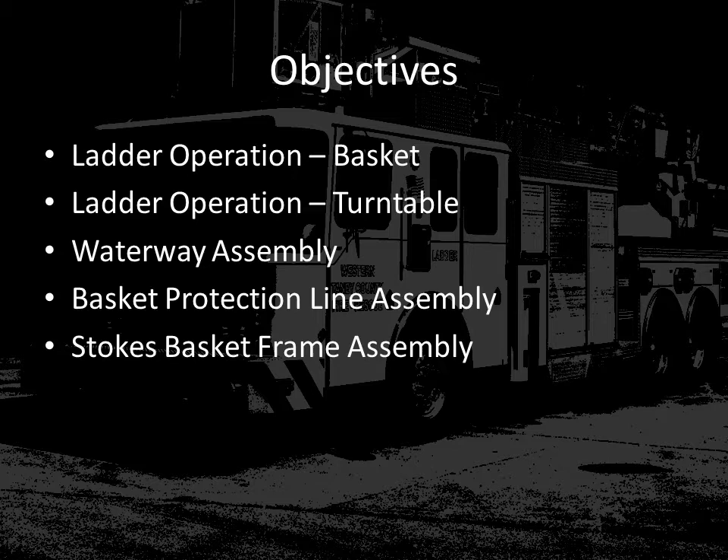A few reminders from Section 3: make sure that the apparatus is properly positioned for fireground operations, whether it be for fire suppression, for rescue, or for ventilation or any other operation. Ensure that the apparatus is free from any overhead obstructions before the final position for ladder operations. And also ensure that the apparatus is properly jacked and stabilized prior to using the ladder.

Failure to follow these quick reminders will delay starting ladder operations. It may prevent the apparatus from being repositioned because other apparatus are now in close proximity, and it may actually prevent the use of the apparatus completely.

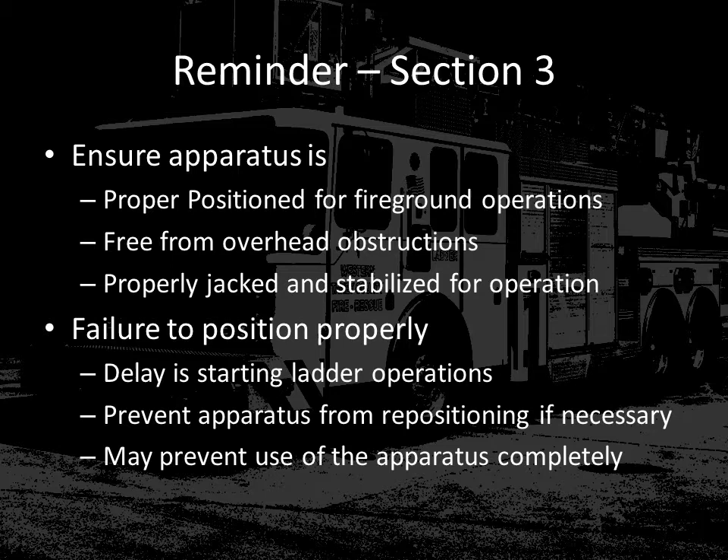When we talk about ladder operations, we're going to begin at the rescue basket. The controls are very similar between the controls that you find at the rescue basket and at the turntable operator's position. Anytime that you're wanting to move the ladder, it's important to remember that the dead man switch on the floor directly underneath the control panel must be depressed for ladder movement.

The joysticks, both in the rescue basket as well as the turntable control operator's position, are progressive, which means that when you begin to move the joystick, the ladder doesn't immediately begin to move. You can move the joystick all the way to its full fastest position, and the computer will open the valve slowly and close the valve slowly to ensure that there's no violent movements within the ladder.

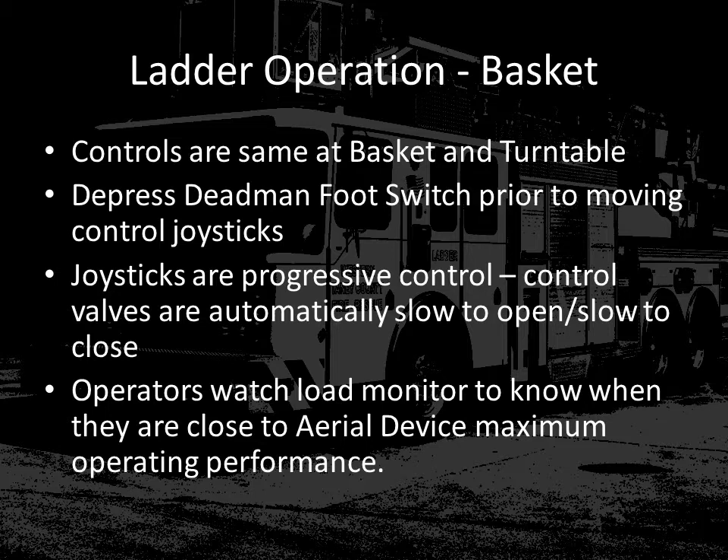Also, you will notice that there is an analog load indicator at the basket control panel. This analog load monitor is allowing the operator to monitor the loads and the stresses on the ladder during operations. And this will be one indicator when you have exceeded or have met the maximum capacities of the aerial device.

On this slide, we have the operating console diagram for the rescue basket controls. At the very top, you will notice a red emergency stop button. This button is to be used anytime there is an emergency situation where ladder operations must immediately stop. It is a button that can be reset.

Directly below, you will notice two joysticks. The left joystick only controls the extension and retraction of the fly sections of the ladder. The right joystick controls the left and right rotation at the turntable, as well as the elevation and lowering of the main ladder.

Directly below the joysticks, you will notice that there are four buttons that are either green or yellow. Starting at the top left of those four buttons, the first button is the engine start or stop button. If you need to stop the engine, this is the button that you can use to control that. The green button directly below is the rung alignment button. If you're going to have someone climbing the ladder, you will depress the button and then use the joystick to either extend or retract the ladder to the next position where the rungs are aligned for climbing.

On the top right yellow button of the four buttons, this is an impact sensor light. If for some reason there is a collision with the rescue basket or with portions of the ladder, this will indicate that the ladder has possibly been overstressed or has come in contact and may have been damaged in some way. The last green button that you see is the automatic auto bed function. When the ladder is ready to be put away and stored, once ladder operations are complete, this will be the button you'll depress to normally store the ladder.

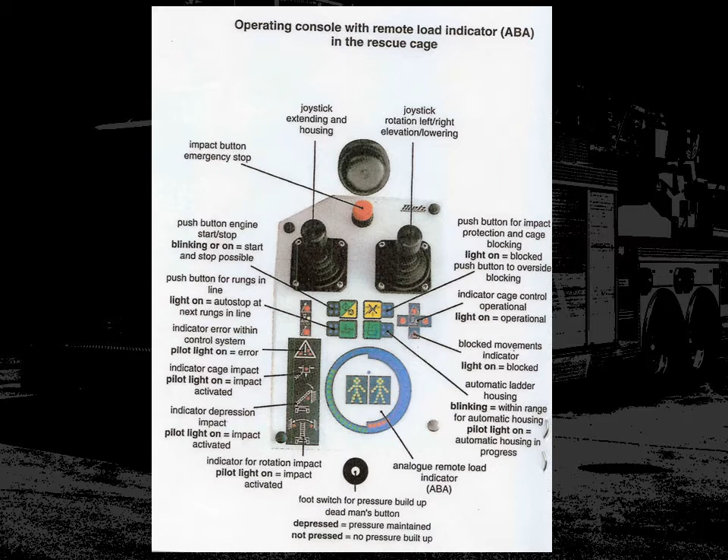Here is another diagram of the rescue basket control panel. The blocked movement indicators are directly below the respective joystick that the indications are for. On the left joystick, you'll notice that there are two blocked indicators as well as a green indicator for normal operations.

If the retraction or extension of the ladder for the left joystick is being restricted, the respective LED will be illuminated. This will be corrected when the movement of the ladder is brought to a condition that is acceptable for the computer. The right joystick has 4 blocked movement indicators for either raising of the ladder, lowering of the ladder, a left rotation, or right rotation.

If one of those movements is being restricted, the corresponding LED will be illuminated. If all movements are available, the green LED in the center will be illuminated. There is also the analog load indicator, as well as other indicators on the panel.

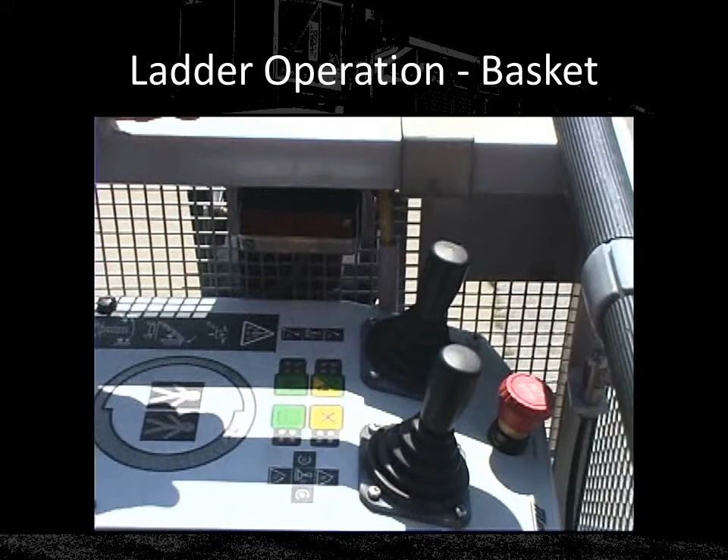When moving to the controls at the turntable, remember that these operations are similar. The layout of some of the controls and their indicators are going to be in a different location from the rescue basket. In the floor pan at the turntable operator's position, there are 2 pedals instead of 1. The pedal on the left is for the intercom to allow communications between the turntable operator and the rescue basket. The pedal on the right is the dead man switch for ladder operations.

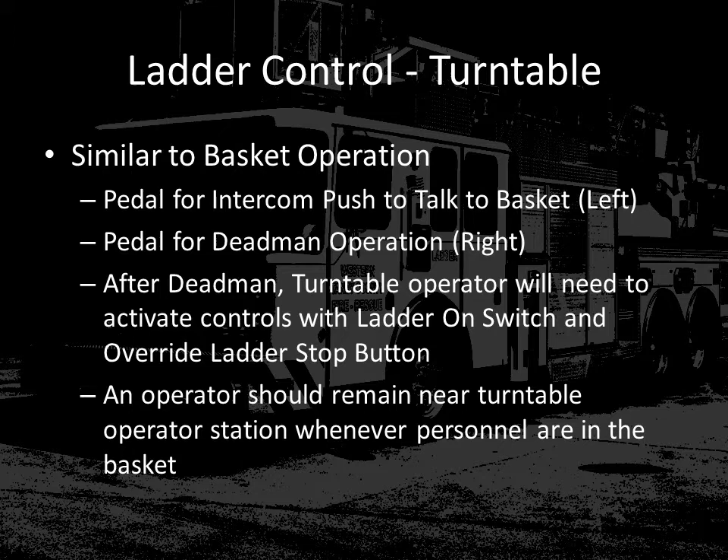Once the dead man is activated, the turntable operator, if they desire to take controls over from the rescue basket, will have to activate the override switch at the turntable operator's control panel. At any time that the rescue basket and the ladder is in operation, an operator should remain near the turntable and the apparatus at all times. In the event that an emergency occurs or a malfunction occurs with the apparatus, it will allow a second operator to attempt to get the ladder stored and get personnel safely to the ground.

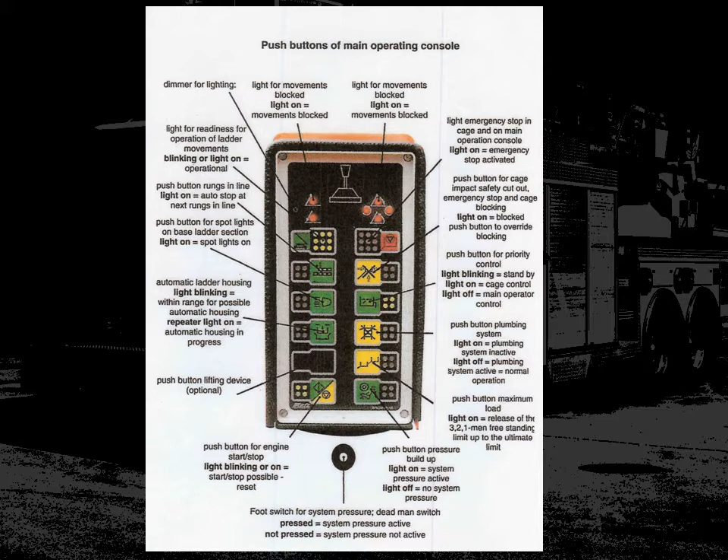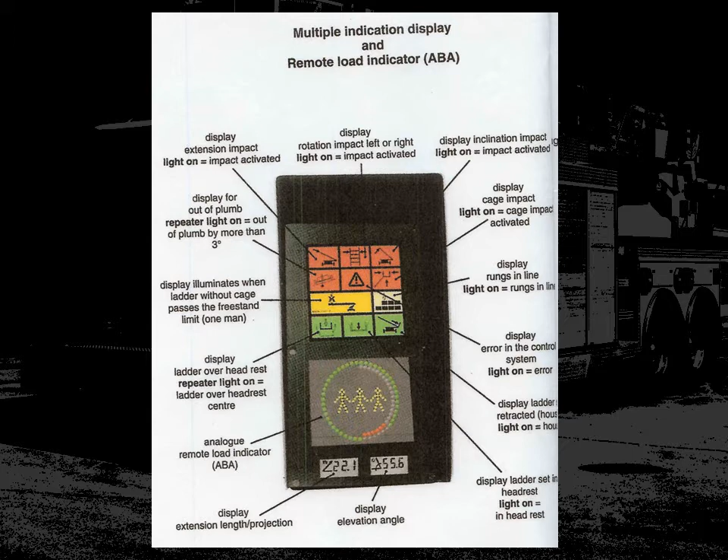Once again, it's important to remember that you'll have a display of green LEDs and red LEDs whenever the ladder is in operation. When the green and red LEDs meet, the ladder has reached its maximum load and now movement restrictions will begin to occur. The 2 digital displays below this indicate the length of projection or extension and also the elevation angle of the ladder. Gain control from the seat, put your foot on the dead man and press the green button. Activate control.

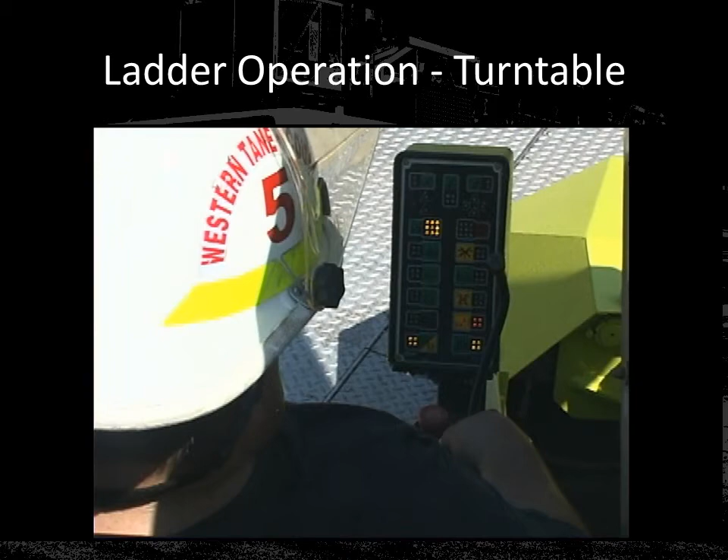Once operations with the ladder are complete and we're ready to return it to storage, remember that normal operations for storage is to use the auto bed function on this apparatus. The auto bed function can be selected from either the basket operator's position or the turntable operator's position. In either case, for the auto bed function to work, the dead man switch must be depressed and then the auto bed function activated using the appropriate button.

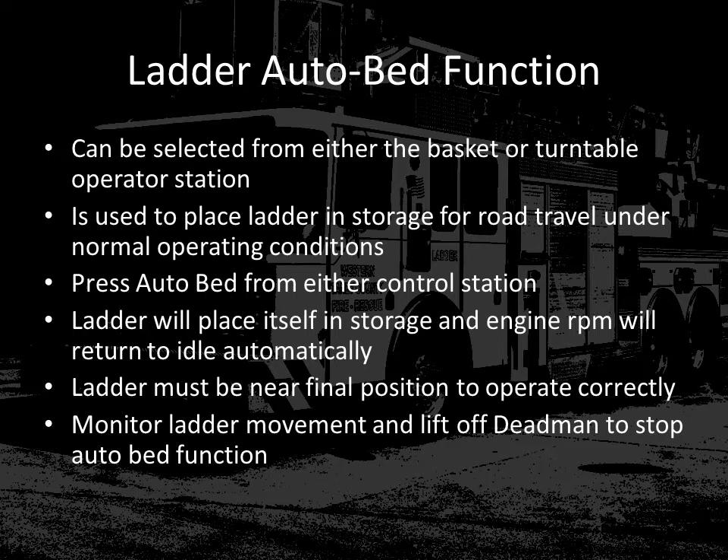While the auto bed function is in operation, it's important to monitor the ladder movements at all times. Make sure that it appears that the ladder will not strike any part of the apparatus and that it will actually bed as is intended. If at any time it appears that there's a malfunction with the auto bed function, simply remove your foot from the dead man switch and all ladder operations will cease.

Now we're going to discuss the analog load indicator more in depth. The importance of this indicator is that it is showing the stresses and loading of the ladder at all times. The red LEDs in the indicator are showing jack loading. The green LEDs are showing ladder loading. It's important to remember that if both arcs, the red and green LEDs, meet in the middle, the computer will start limiting movements in certain areas.

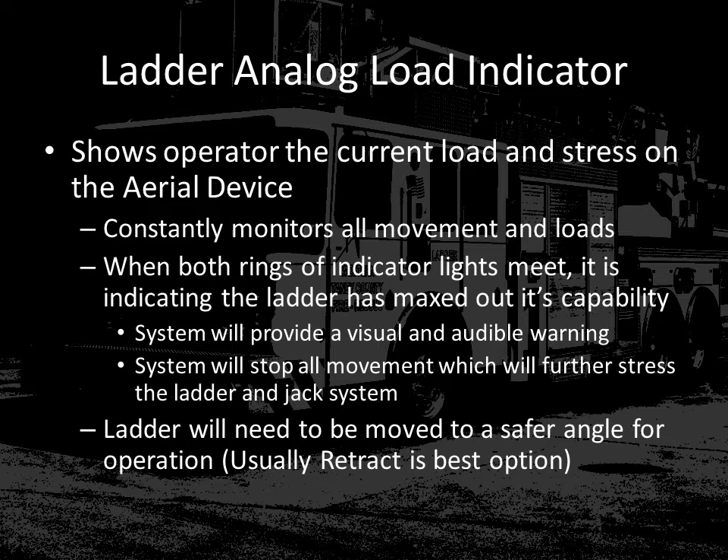The way to correct this, to be able to continue to use the ladder, will be to move to a safer angle. This usually will be either retraction of the ladder or an increase in ladder angle. As we look a little closer at the analog load indicators, remember we discussed on the turntable operator's position the ability to push a load override once, twice, or 3 times.

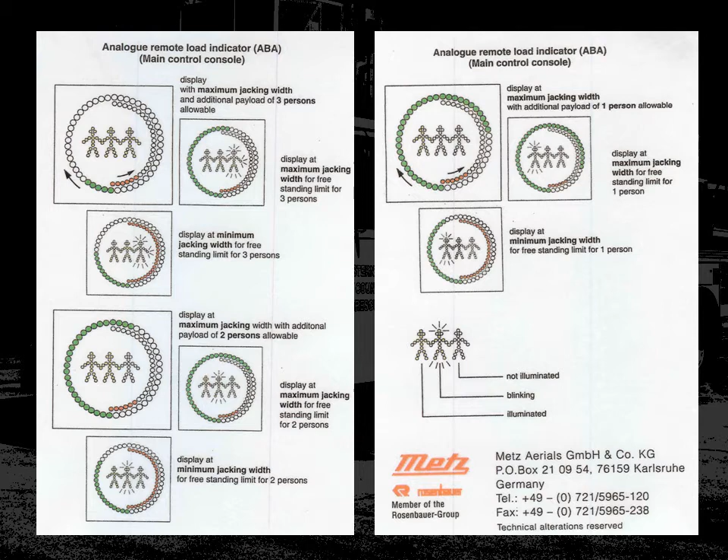If you look in this diagram where we have 3 people indicated in the center of the display, when you press the button once, it's indicating that 1 person is in the basket. Push the button twice, it'll indicate 2 people in the basket, and push the button 3 times and it will indicate 3 persons in the basket. Remember that you have a series of green and red LEDs. Once the green and red LEDs have met in the arc, the computer will then begin limiting movement. The way to overcome movement limits is to change the angle of the ladder or retract the ladder to decrease the amount of load.

We're now going to discuss the turntable ladder. Unlike other apparatus that normally have some form of platform to allow you to gain access to the main ladder from the ground, because of its design, we have a specific ladder designed for this purpose. The ladder is stored on the apparatus cab on the passenger side. Once you remove the ladder from its storage location, it will engage a bar mounted to the top of the main ladder at the rear of the apparatus. The hooks mounted to the ladder will engage this bar. On either side of the ladder, there is also a release mechanism to be able to extend the ladder to ground level. You'll extend the ladder a sufficient distance to provide for a normal climbing angle to gain access to the ladder.